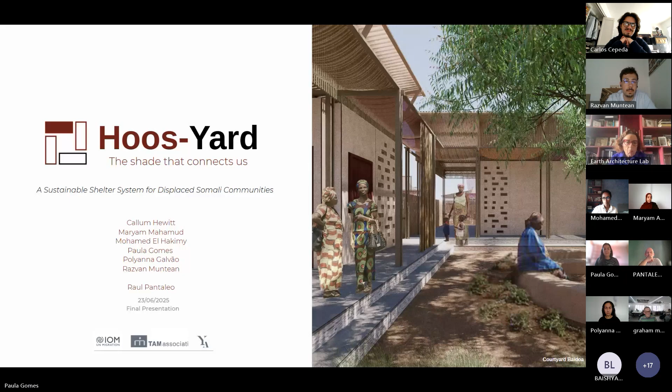Thank you, Paula, and welcome everybody to our presentation. So this is our content. We're focusing on the existing problems and then how to find solutions and strategies, going from our unit to the cluster scale and ending with the urban scale. Paula, next.

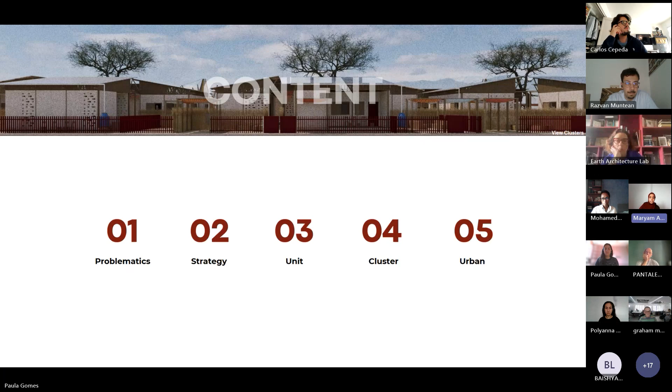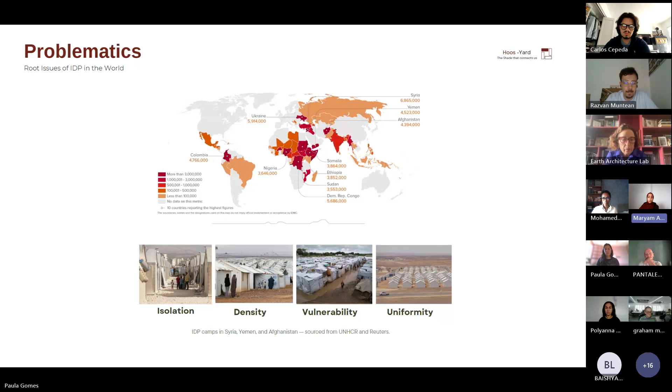We did some studies on IDPs in general. Today, the issues that are very prominent in any shelter strategy are, first of all, isolation, density, vulnerability, as well as uniformity. So this is a root cause that exists within the world. And if we look at the numbers, Somalia is one of the countries with the top IDP numbers, and it shows it's a huge national crisis. So looking at that problem in general, we wanted to see how we can propose a solution that would address the architecture at large, as well as Somalia specifically.

Secondly, they're in a fragile state. These people had lives going on, but then disruption happened and everything stopped. The third part is lack of integration. They don't integrate easily, and that is because they think of when they will go back to their homes. So one of the ways to tackle this would be, how can we make this area or this transitional phase somehow their home? And finally, the IDPs in Somali communities are mainly women and children. That tells us exactly the user we're dealing with. They're very fragile and they are at a building stage.

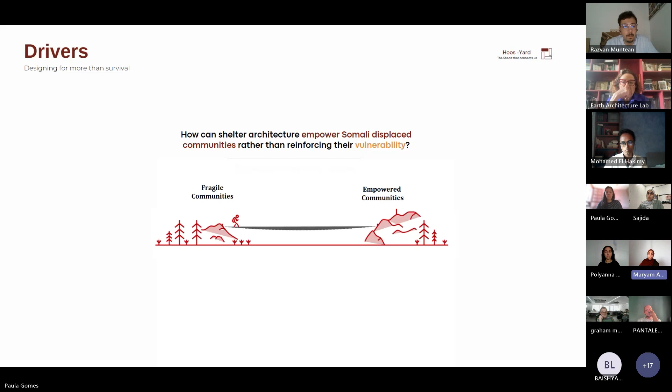So our design driver and design question was, how can shelter architecture empower Somali displaced communities rather than just reinforcing their vulnerability? This is one thing that's very prominent in the entire world, but we want to look at it differently. How can we use architecture as a tool to break away from fragility and move into empowerment? So Paula, next, please.

One of the ways we can easily do that is establishing the core Somali values. If we look at any Somali society, there are very prominent values that exist within all Somalis, whether they're based in Somalia or in the diaspora. One of those values is community festival. They're very social. Secondly is identity. They really hold and respect their culture and traditions wherever they are. And thirdly, it's resilience. They do not hold back and they don't stop. So they always find ways to keep it moving.

Paula, please, next.

So when we started approaching the design, we wanted to see how can we bring beauty into these everyday spaces, because we're designing a home, a shelter. One of the elements that exist within any Somali neighborhood, Somali street, Somali household is, number one, very strong identity, strong use of colors, strong use of traditional patterns, as well as motifs and paintings and pottery. So we wanted to see how can we extend the normal neighborhoods within Somalia to the shelters or the IDP camps. That started with identifying the spaces. So we started seeing, number one, identity in space, how can we take it with us?

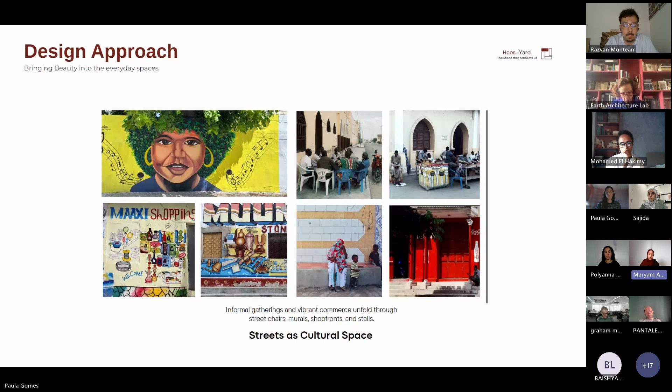And then secondly is the wall murals. They use a lot, even in their storefronts. Somali people love painting and they love colors. So instead of using the typical posters, they opt for using any painting that could depict exactly what the shopfront is selling or what it is about. So these are reference images from different areas of the city showing exactly that as a cultural concept.

Finally, acts of resilience. They always set up different stalls, different micro businesses are reflected through the Somali streets. And that also tells us how the line between the street and the Somali home is very blurred, because in most of the world, there is a proper line between public space and private space. But in any Somali city, you will notice that the semi-private area is the shop fronts and the frontal stores, and they use it. So in our design approach, these are the spaces we're catering to, and we want to showcase how we can bring them within our identity and the reinforced shelter strategy.

Forward, Paula, please.

So now that we have our approach, our main idea is, first of all, starting with a courtyard and a central tree, respecting the Somali traditions that existed for centuries. Trees hold different symbolism. They are more than just a gathering space. It's space for storytelling, teaching, and a lot of that. So from one shaded courtyard, our design builds up networks of homes, shared neighborhoods, markets and streets, and different urbanism functions. So basically, that is the entire courtyard strategy, with which we aim to translate the cultural heritage within design.

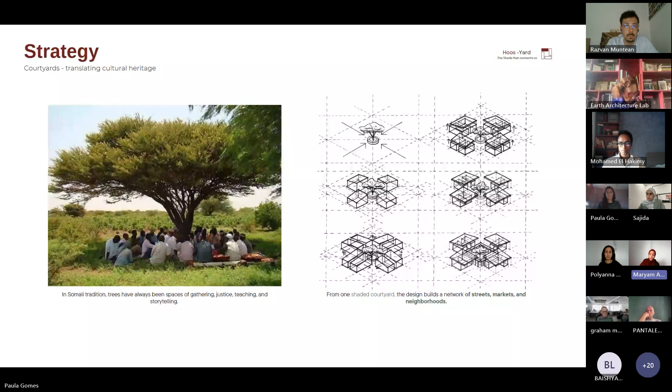Forward. So our IDP housing strategy is how can we create a settlement that starts from unit, then moves into a sustainable cluster and integrates seamlessly with the city. One of the ways to do that was creating neighborhoods with 4 families each and a central courtyard that builds up trust, which is definitely something they would need to function properly and to be back on their feet. That allows us to have a sustainable cluster with fully integrated smart solution systems. And then from one micro unit, we extend into an entire micro neighborhood that could easily fit in with the existing city or the host city.

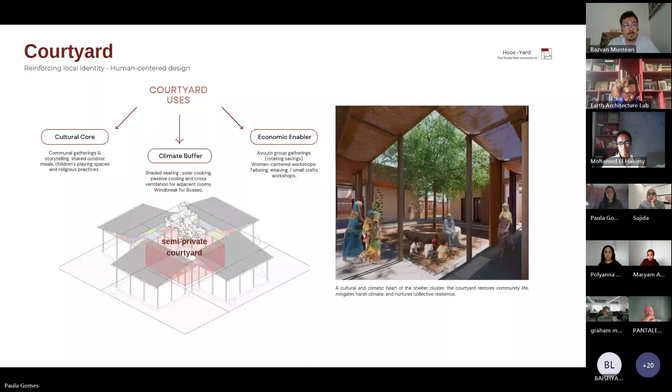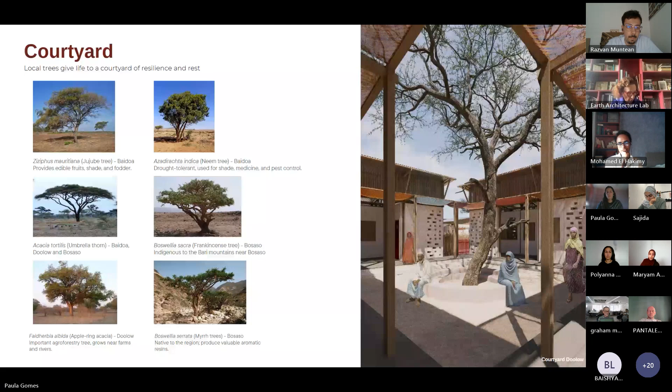Okay, hello. So we begin the implement. Okay, can you hear me?

Perfect. Okay, so we begin the implementation of our concept with a general approach across all sites. All plots will share the same geometry and an approximate area of 110 square meters. Their placement is designed to allow the formation of the semi-private inner courtyard that my colleague talked about. The core structure of the shelter will be a timber frame set on stone foundation and a single pitched roof of CGI sheets. This structural module will be replicated identically across all plots in all the 3 sites, serving as our proposed solution for the emergency phase of the project.

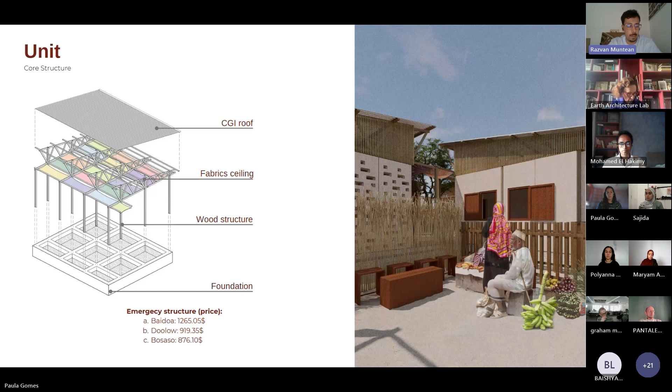In this initial stage, residents will be able to install lightweight partitions, such as fabrics or CGI sheets between these pillars to form their basic shelter. If we go next. We aim to give families the freedom to decide how they will use their plot and how they configure their living spaces. Our proposal offers a variety of wall types and shading veranda system. The walls are made of different materials depending on the site and are categorized into these 4 types. So we have solid wall, ventilation wall, window wall, and door wall.

Each family within the allocated budget of their unit will be able to obtain approximately 10 to 12 wall panels and 3 to 6 verandas. And we need every time 2 walls to infill a space between 2 pillars. So each wall has a width of 1.20 meters. This approach ensures that the main shelter structure remains robust, consistent, and professionally built, while the infill walls are left to the discretion of the residents, integrated with the help of IOM. This strategy introduces architectural diversity and allows each plot to gain its own identity and character. We can move forward.

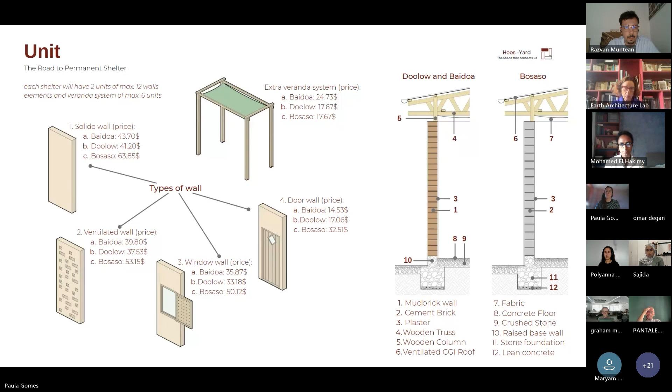As previously mentioned, the rigid timber structure represents the emergency phase of the project. Once the wall panels are added, we transition to the permanent phase. And in the future, we also anticipate possible extensions, which will be presented later. Below, we showcase our proposed wall layout options. All configurations include 2 rooms and a total interior area of around 21 square meters. Each family can choose its favorite layout. On the right-hand side rendering, we see an example of a permanent shelter built in Bosaso. We can move next.

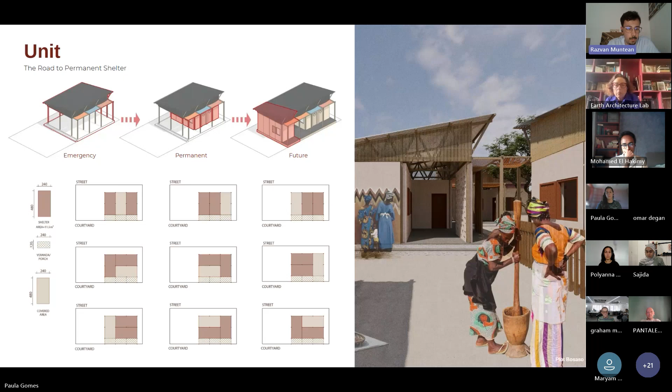So in order to ensure sustainable design, we began by analyzing the natural environment in which the project is located, and we looked for solutions specific to on-site conditions. In addition to rainwater harvesting from the roof, we also propose a system of harvesting water from atmospheric humidity. This strategy was identified as particularly relevant in Bosaso, where rainwater is almost entirely absent throughout the year. Humidity harvesting systems are commonly used in coastal regions, and several studies confirm their effectiveness in arid climates. Also in Yemen, we have such systems. And we recommend that future feasibility studies can be conducted to evaluate and implement such systems at scale. We can go next.

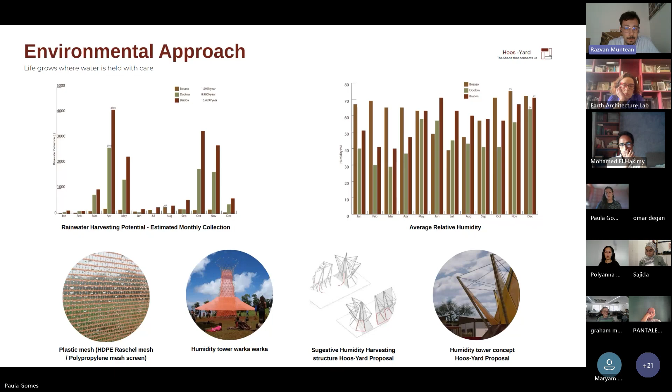Our proposal is self-sufficient, and designed to support an economically sustainable lifestyle. The large roof surface we propose significantly increases the amount of rainwater that can be harvested throughout the year. For example, in Doolow, a single shelter can collect up to 15,000 liters of water annually. The roof also enhances natural ventilation inside the dwelling and partially protects the walls from sun. Beneath the wooden trusses, we hang fabrics for thermal comfort.

By elevating the roof highest at the center, we also create shade areas in this semi-private interior yard. And each cluster includes a tree, which contributes to the air quality and thermal comfort. And moreover, the urban layout allows the future integration of shelters into public water and sanitation systems, ensuring long-term adaptability and resilience. And we can go to the next one.

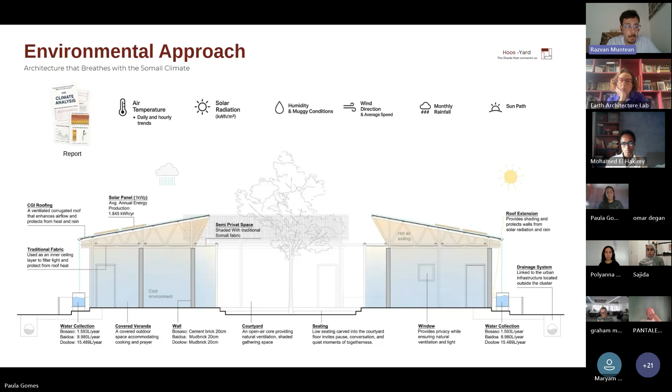Yeah, like we mentioned before, we are creating a cluster system of at least 4 shelters centered around a courtyard and a tree, like Hasban mentioned. The idea of creating this cluster system is also to foster a sense of community between families that might never have lived close to each other or even know each other. So this spreads from the smallest scale in the sense of the shelter into the urban scale, like we're going to see next. As the families are moving through these sites, not necessarily from an existing community, we can create this community within each site.

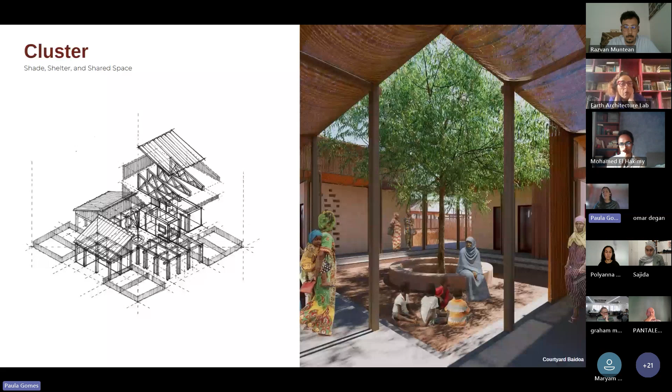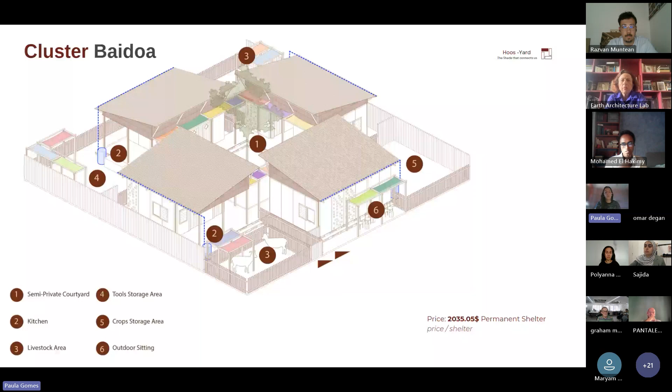So moving to Baidoa, we have seen that each city has a different scenario through how the families are living and their livelihood activities. So Baidoa is a farming livestock community. It has been, sorry. Is missing something here, sorry. Yeah, Baidoa is mostly a rural site composed by pastoralist communities. So for that reason, at the cluster scale, we focus on having outdoor empty areas for each family to keep their livestock, be it sheep, goats, or even a crop storage area for them.

So like Hasban mentioned before, we have a permanent shelter, which is composed by the 2 shelters plus 1 veranda. And in the future, we see that it can be expanded by adding a new shelter, a new unit where we can also locate a toilet. But we're still keeping these areas outdoors for the livestock or their workshops or anything that will fit into their livelihood activities.

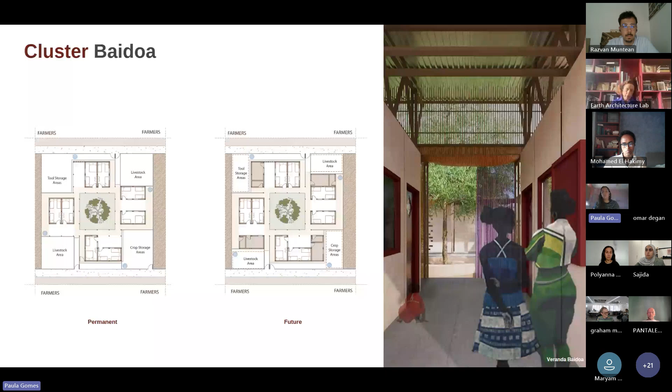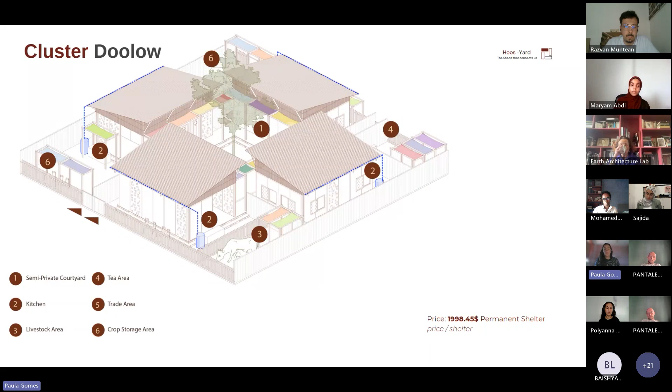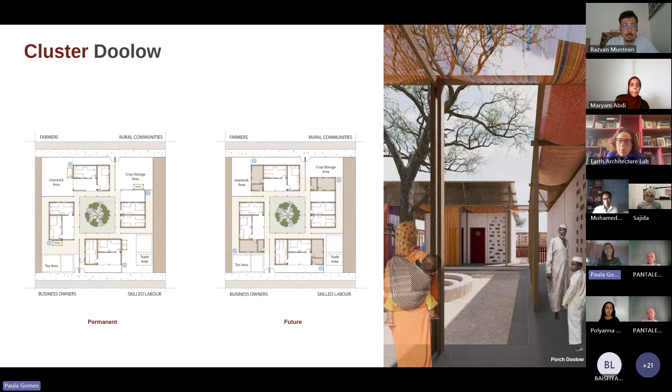So for Doolow, we have a mostly farming community. They need spaces to do their livelihood activities, so we are thinking of having small yards within the cluster, but also giving them bigger livelihood areas on the urban scale. The same thing with the plans. We have crop storage areas, areas for tea shops, trade areas. So these communities, being more farmer related, would also have some produce they might want to sell to their neighbors that produce a different thing. And the same way, we imagine in the future they can have an expansion to have another shelter, another unit, and have the toilets included as well.

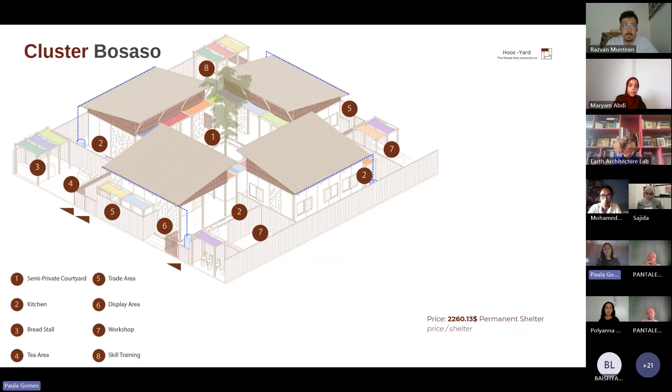And Bosaso is the most different one in terms of community and their livelihood activities. The area has the harshest climate, so they're not very prone to farming or livestock. They mostly work with markets and shops and informal markets as well. So we try to think of creating shaded spaces with our veranda system where in the future they could have their shops, tea shops, coffee shops, bread stalls, things that can create this sense of community, but also give them a livelihood and the power to have their shops within their own cluster, their own plot.

So these plots are usually more occupied through trades, through workshops, skill training areas where they can have workshops with their neighbors and create this other sense of community as well. Also, the extension area is still included in every plot for the future.

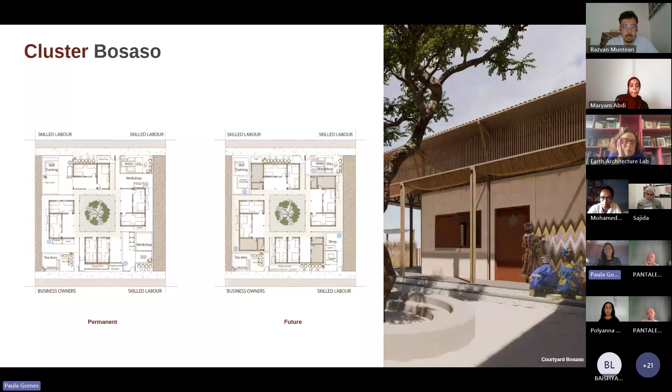Also within the cluster system, we have identified the potential of creating a toilet area where we have separated women's and men's areas. So like Arya mentioned before, the fear of women going to the latrines placed in existing IDP sites, we try to reduce that fear and create a more lively space, having these toilets always facing either local or main streets and having the separation of gender. And in the future, like I said before, we identify the potential of having the toilets move into the plot. So this area could be further developed into a new public space.

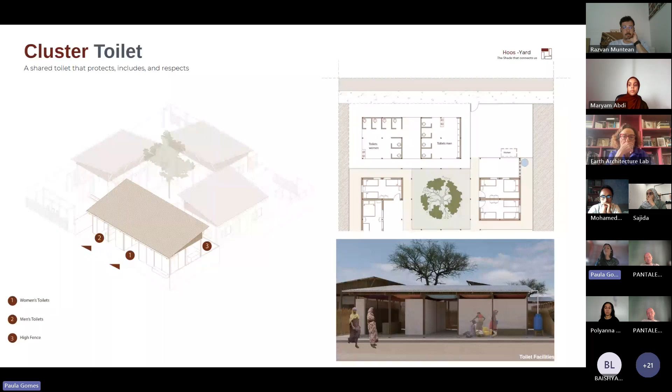We think of using for these toilet units the same type of structure that we are using for the shelters, so it would be easily built by the community, but also separated from the existing shelters within this cluster. So thinking of the future and how we can grow urbanly, we see that our cluster system moves to the urban scale easily. We have identified the potential of our system to be adaptable to different IDP scenarios, not only in Somalia, but other scenarios as well, because it creates easy growth and expansion and can be easily adapted to different morphological sites. So looking more at the urban approach, we have established some ground rules for how we develop each site.

So first of all, we have an urban infrastructure of always having bigger main roads at least 6 meters wide and local roads at least 3 meters wide to allow cars and emergency vehicles to go through the site if needed, and also to create evacuation routes for the entire site.

We created different size of clusters, so not necessarily only a 4-plot cluster. We can have 6, 8 clusters or different shapes of courtyards depending on the needs of the communities and how the presented site is. We have one toilet cluster placed no more than 15 meters away of every plot.

And we created public areas and public facilities within every site given, every scenario, because we've identified that some are lacking public facilities around, or we've also identified their livelihood activities that need bigger areas to exist, or how these also gather the community and foster a sense of community in different scales.

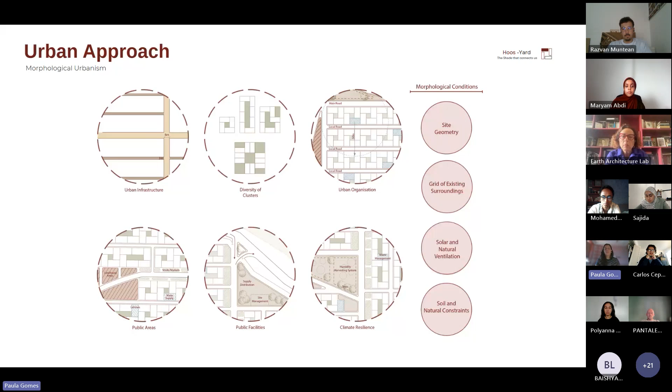So now we're going to look specifically through each site, starting with Baidoa, a pastoralist community of about 140 households. Following our clusters, we are getting to 140 plots within the site, having the water facilities, the courtyards, the common spaces. Baidoa is an area where there are more public spaces and facilities around, like a mosque, a school. They already have a borehole in the area.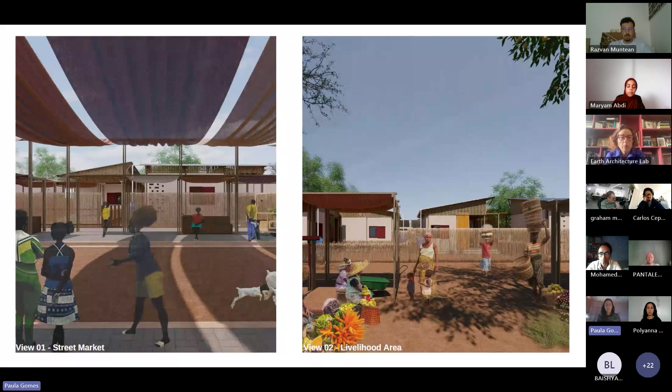And now we have Doolow, which has a unique characteristic, like Maria mentioned before, because tenancy of the plots is not that long. The two plots down on the left have a shorter tenancy, so we try to place most of the plots on the right-hand side. You have about 165 plots in that area, and on the lower one on the left, we have 42 plots, which totals 207 plots, 7 more than what is asked in the scenario.

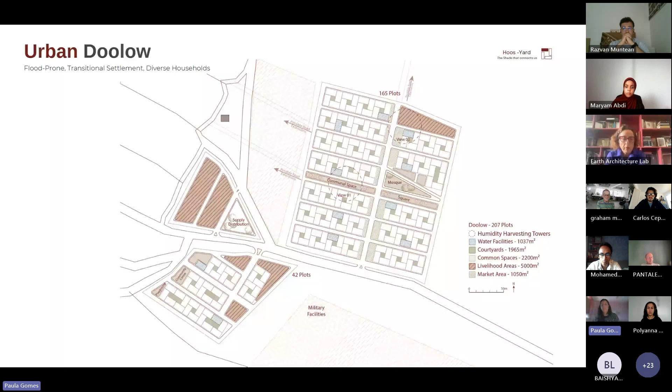We also have the communal spaces and the livelihood areas around it, and we try to place especially the farming area on the left in the plot that has a shorter tenancy. Also, this area doesn't have a mosque around, so we place it in our site. And we try to implement these public facilities and activities to also foster the sense of community.

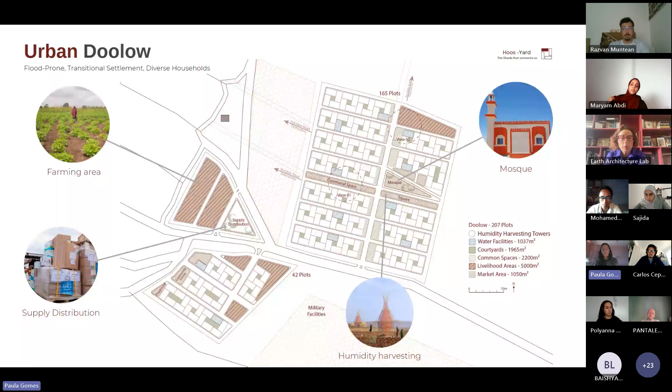So like I said, on the left, we have the common use areas. These are the toilets in the back, the humidity harvesting, and we're creating this space almost like a square that can be a transitional space for the community to have their gatherings and day-to-day activities. On the right, sorry, we have the livelihood area for the farming and the livestock if they have.

And in the back, we have another example of the toilet facility happening quite open to the eye of the public to increase the sense of security of whoever is using it.

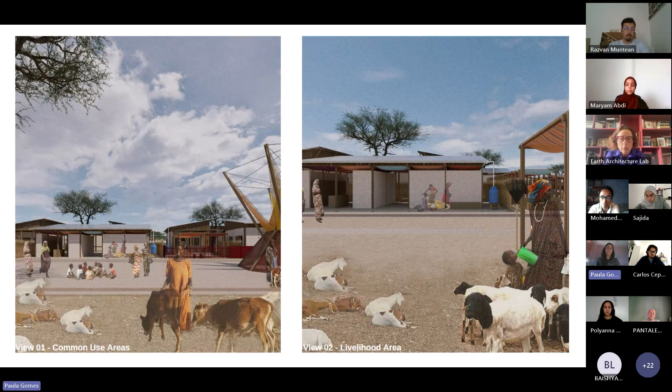And lastly, we have Bosaso. Bosaso is the city with the harshest climate, with really strong winds. So we try to place in the areas around the plot, especially on the sides, these public activities that could create a barrier for the shelters and the households from this harsh climate. Also, this is the city that doesn't have much of a livelihood around farming.

So we have the strongest market area, and Bosaso is also in the expansion area of the city, so there are not many public facilities around. So we've included a mosque, communal space, women's center, school, all these ideas that could be implemented in the site. And we are also meeting the requirement of the 225 plots.

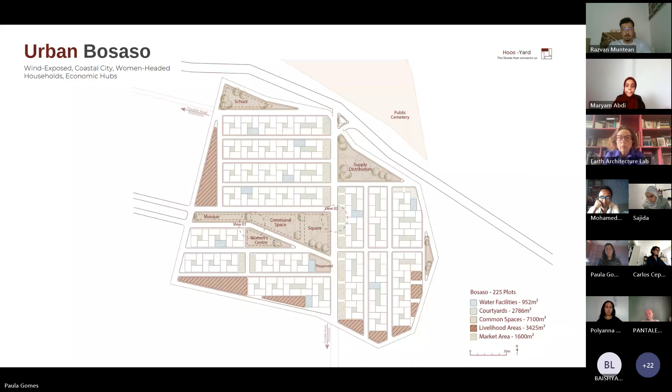Like I mentioned, with the supply distribution, we also try to keep the supply distribution area always close to the entrance of the site, so it will be easy for them to bring maintenance and anything that the site might need.

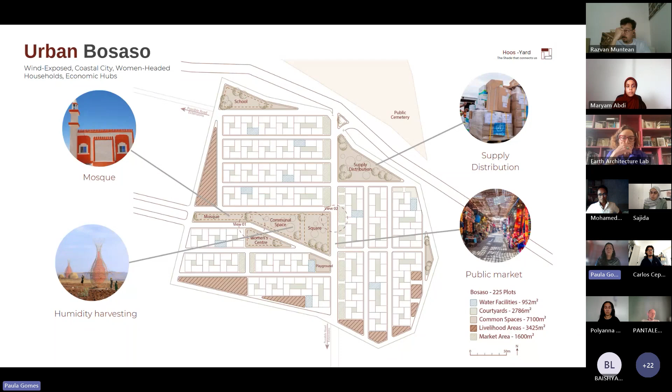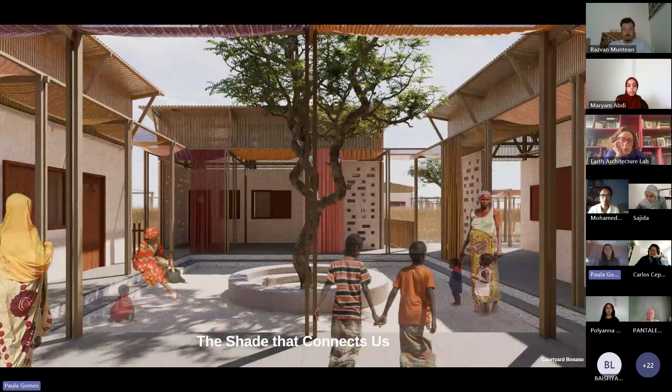So in total, we try to create a system that allows the IDP families to create a sense of community through every scale, be it the shelter scale, the cluster scale, and the urban scale, and uniting them, connecting them through this idea of a shared courtyard and a shared space.